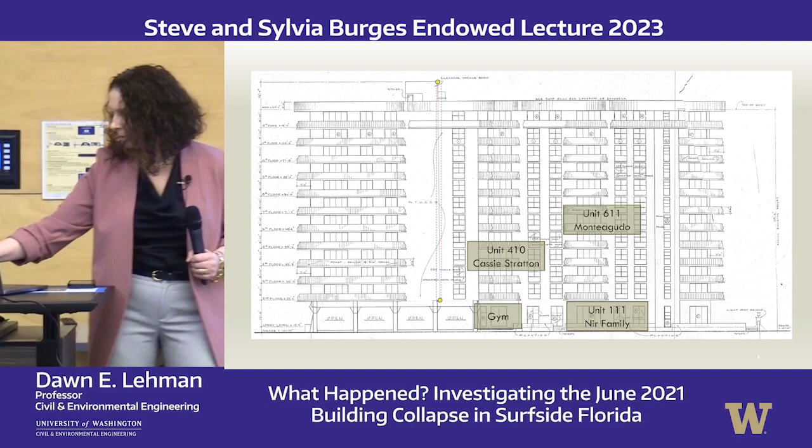Around 1 a.m. in the morning, the Nir family had just gotten home. They were a particular sect of Orthodox Judaism, out celebrating the high holidays. When they came home, they heard some strange knocking noises. Sara Nir, the mom, lived with two of her children, Gabe Nir being one of them. The security guard also heard these strange knocking noises between 1 and 1:14 a.m.

At 1:14 a.m., there was a couple who split their time between Argentina and Miami, actually telenovela stars. Because my colleague Sarah Blaskey understands Spanish, she knew what they were saying, though they didn't want to be interviewed, so I want to respect that. What's important is they drove into the garage at 1:14, didn't see or hear anything, and took the service elevator up. At 1:15, they got lucky because that elevator always stops at the first floor, and as soon as it reached the first floor, they heard a thunderous clap like others did.

That was essentially when the pool deck collapsed. You can see this is the tower where all the people live, and this is the pool deck. These red dashed lines indicate the extent of what we can see, which is really important as we try to understand what happened. We don't exactly know what happened as we move towards the tower, because that's where the rubble pile is.

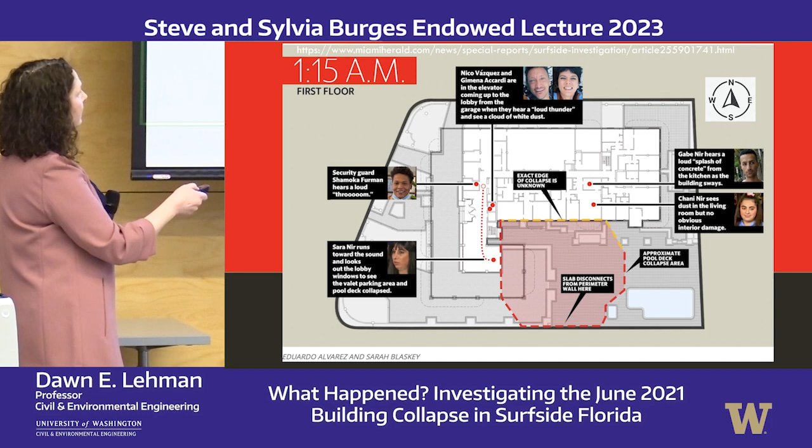At this point the pool deck fails, Gabe Nir and Chani Nir, who are in Unit 111, move and run out. The security guard hears a loud boom. Then Sara Nir, who was talking to the security guard trying to figure out those knocking noises, runs south and comes to a place on the first floor where she can see out, and she saw the pool deck collapse. Everybody on that first floor who heard this exits the building.

Then, to confuse all of us, there was a video — I think on TikTok, but I can't be sure. Social media has become incredibly important for these journalists. There was a woman just to the north at a hotel who took out her iPhone and filmed into the garage. You can see what looks like water, and concrete rubble on the ground.

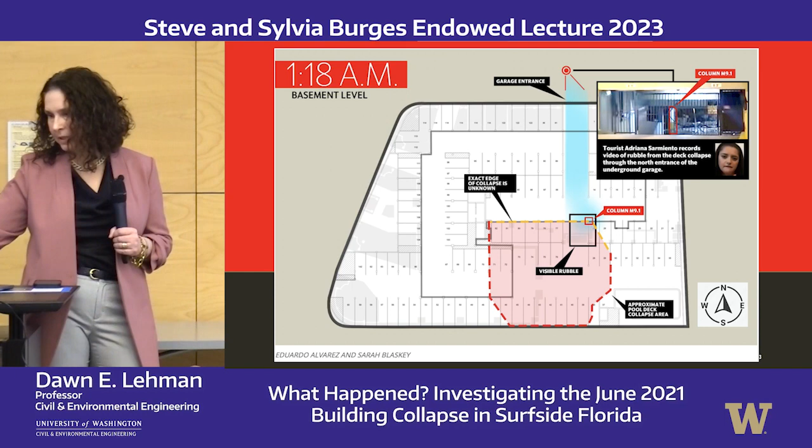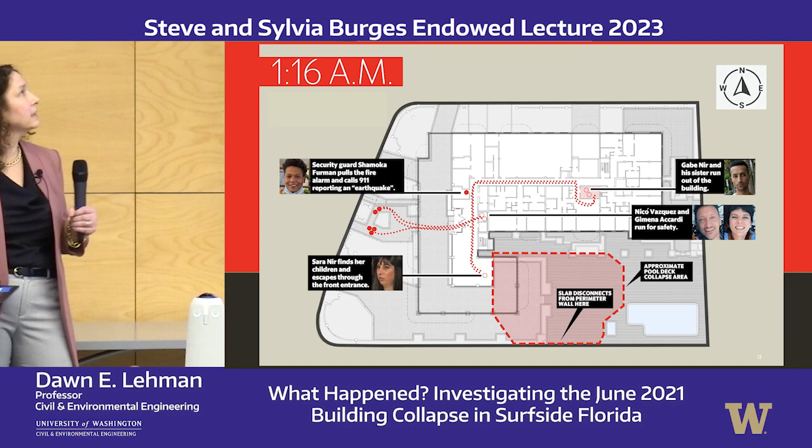Until we understood this collapse sequence, we thought maybe that had failed before the pool deck failed. At 1:16 a.m., as they leave — this is looking into the building, from the Herald — you can see that rubble we'd seen before. Over the years there had been a lot of reports of water intrusion, which is going to be important when we start thinking about how that impacted the failure modes.

At 1:20 a.m., Cassie Stratton, on the 4th floor right above the gym — which becomes important — called her husband to say, 'I'm so glad we didn't leave our cars in the shop, because the pool deck caved in. There's a sinkhole.' I think that's a fair way for a layperson to describe it. She told Mike Stratton that as the pool deck failed, it was coming towards her, which is also important.

When Sarah and I talked to Mike Stratton, we learned there was a building just to the south with an easement between the two buildings, and a sprinkler or irrigation system kept watering that portion of the pool deck. So it was just to the south of the pool deck, but it was watering it. This whole concept of water intrusion through the pool deck becomes important as we try to understand what might have happened.

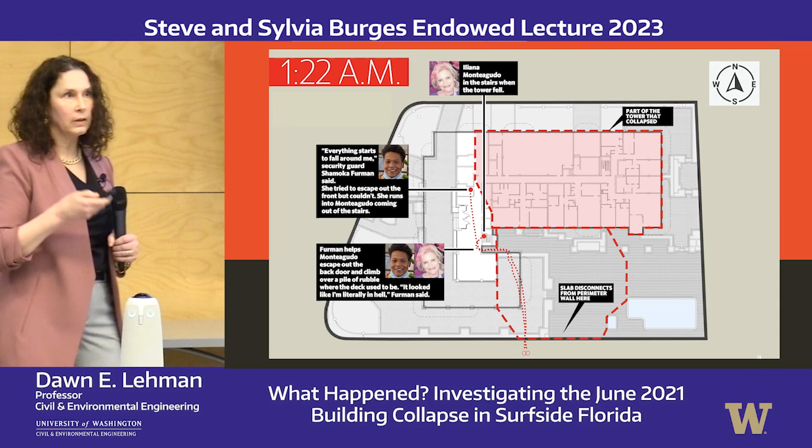And that also becomes important as we look at damage in the building. I've put this up here because this is not an engineering aspect, but it is an unfortunate truth of this tragedy, which is that because the security guard was not trained in using the alarm, and we know there's 7 minutes between when the pool deck collapsed and when the tower collapsed, most likely people's lives could have been saved. If you heard at all about the lawsuit, part of the settlement was with the alarm company. I just want to point that out. If you're interested in learning more about any of this, the Herald has done a great job on that.

Okay, so we have a timeline. We know that there were 7 minutes between the pool deck collapse and when the tower collapsed. And we know when the pool deck collapsed, it was moving towards the tower, not away from the tower. So I still haven't told you what happened. You still don't probably have an idea what happened. We're still sort of here, right? Except that we know that this pool deck collapsed first, and it progressively collapsed towards the tower.

So in order for all of us to think about these things, I want to use some information that I know and anybody else in this room who's a structural engineer and understands reinforced concrete knows. This happens a lot after earthquakes, and a lot of you might know I have done most of my research in earthquake engineering. It might have seemed strange that I decided to take this on. But one of the things is, I studied this building actually with a colleague of mine who's here, Laura Lowes, and we tried to understand what happened to this building.

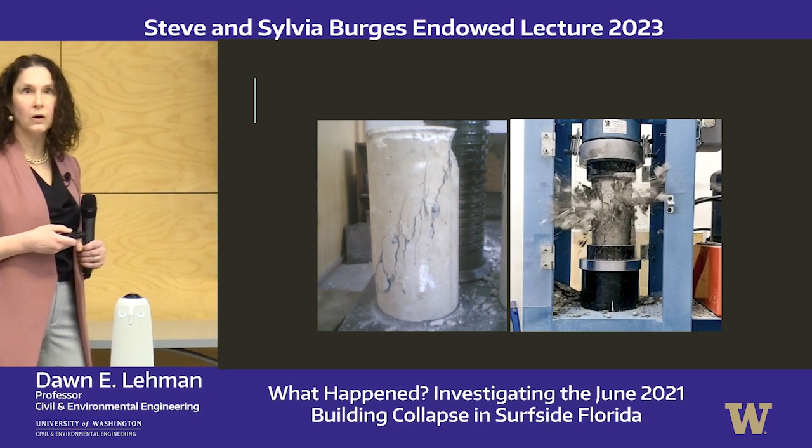Now, how can I say something about it? Well, I can say something about it because I understand how reinforced concrete behaves. And in the next 6 slides, you're going to understand too. So the first thing we know about concrete is that it's good in compression. This is a cylinder - we like to test concrete cylinders to figure out the strength and the stiffness. One interesting thing here is in addition to these vertical cracks, you can see there's this diagonal pattern, and that will become important. The other thing to know is when concrete fails under a compressive load, it can actually be quite explosive. So we don't really want that to happen.

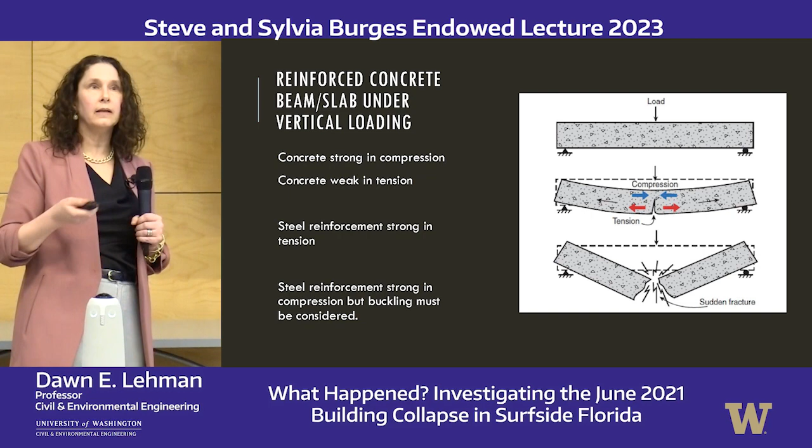So what should we do? Well, a lot of times we like to use structural members so that they carry load, right? For example, this roof, somebody needs to be able to design this for the load we expect, especially the dead load, which is the self-weight, anything that we know is going to be in the structure permanently, and live load - those are unexpected weights: furniture, people, equipment, etc. So we tend to have something that spans between maybe 2 columns. It has a load on it, and the top here is in compression, and the bottom's in tension. It's not always that way. But as we said before, since concrete's not good in tension, it'll just break through.

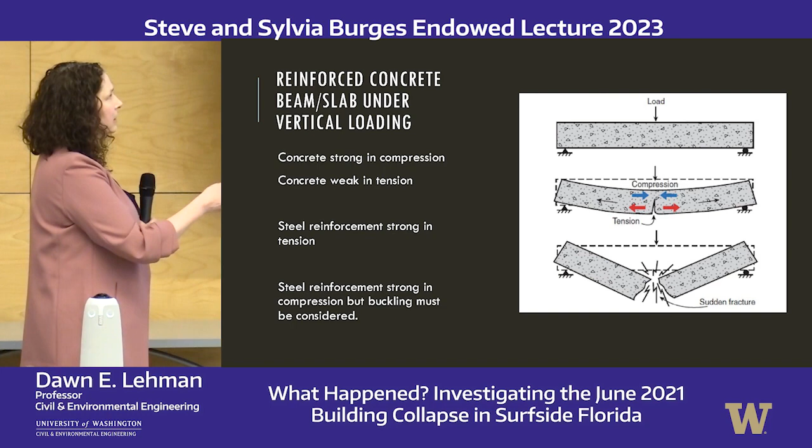So what we do is we consider how these forces are being carried, and we actually place steel where the tension demands are. You can see here, this is a beam that's being subjected to that same point load. The compression forces are at the top - you can see that there's some damage here. But in the tension forces, you can see there are these cracks that are vertical, and we place the reinforcement here to take those forces and also to keep those cracks closed. That's also important when we think about corrosion.

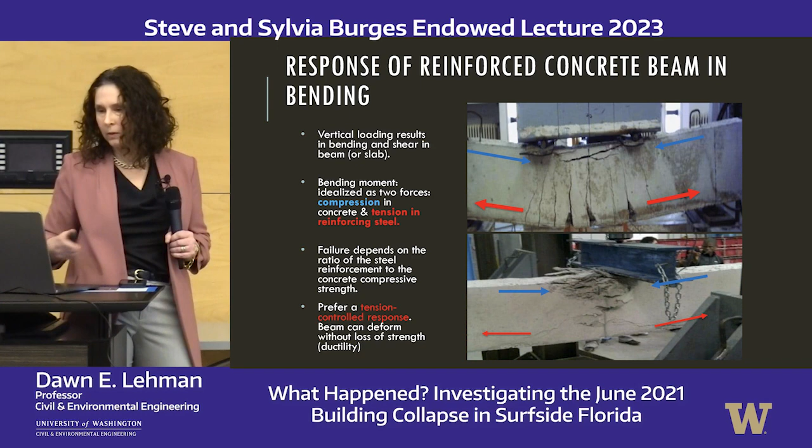If we had a lot of reinforcement that was so much, such a huge area, really strong, then we might end up actually changing our failure mode to compression, and we don't want that. So in general, anything that's bending, a beam, a slab like this, we will see cracking, and we'll place our reinforcement to sustain the tension.

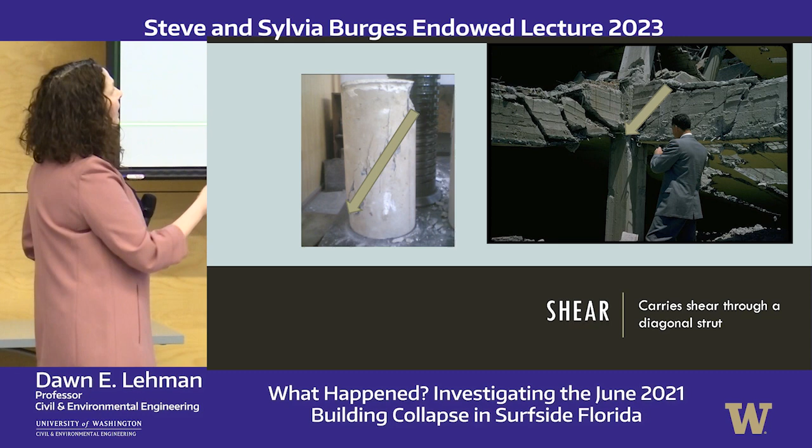The other aspect of concrete that really is not welcome is shear. I talked a little bit about this diagonal strut, because one of the ways concrete carries compression is through strutting action. You can see here, this is a column that failed after an earthquake, and you can see these diagonal cracks that are very open. But you can't carry compression perpendicular to the crack because the crack's open, so you need to carry compression along the crack. That's how we carry shear in concrete typically, which is also going to become important.

The last thing I want to talk about is bond. What is bond? If I have concrete and I put steel in it, I need to transfer those forces between the steel bar and the concrete. If you've ever seen a reinforcing bar, you might see that they have what we call deformations. Those deformations are there to transfer the force from the steel into the concrete and vice versa. So it's almost like another material: the concrete has a strength, the steel has a strength, and the bond also has a strength.

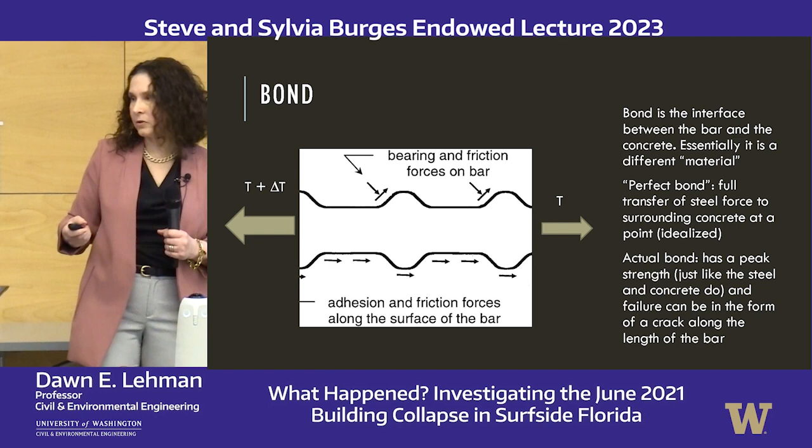If you have high bond demands, you will run into trouble. So you need to have bars that are long enough to allow that transfer to happen. Maybe if you start running a lot of water through this slab or this beam, the concrete properties might not be what you assumed in your original design. Now, I don't know that, but that is possible.

The other place we need bond is when we want to fully anchor this bar. Maybe you've seen after an earthquake, we will have vertical bars from a column going into a foundation, and if those bars aren't long enough, they will just pull out and allow that to move over. So these connections are going to become important.

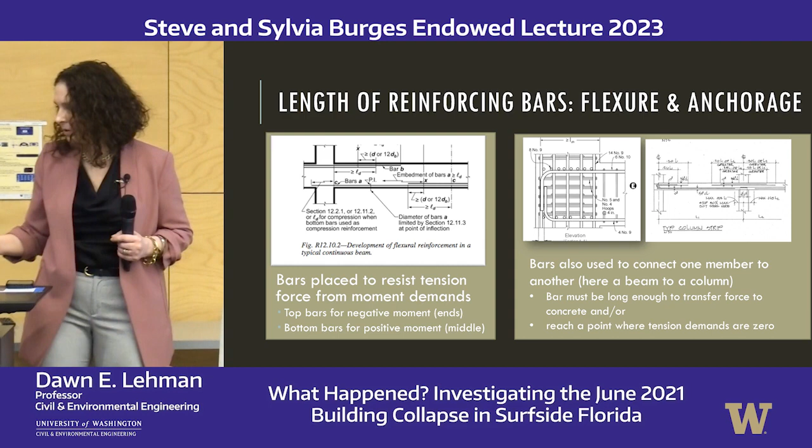So compression: concrete's good in compression, stiff in compression. Tension: anytime we have tension, we really want to have an orthogonal bar to the crack to take those stresses and keep those cracks closed. Also, bond, making sure that the bar is long enough to fully transfer the force from the bar to the concrete, and shear, which concrete likes to carry at an angle. There. Everything you need to know about forensic engineering of concrete, right there.

So now what do we need to do? Well, before I start looking at all these pictures, let's take a little gander at the structural drawings. So again, this is the L-shaped tower we've been talking about. The red rectangle is around the portion of the tower that collapsed, and the green shows the portion of the tower that's still intact.

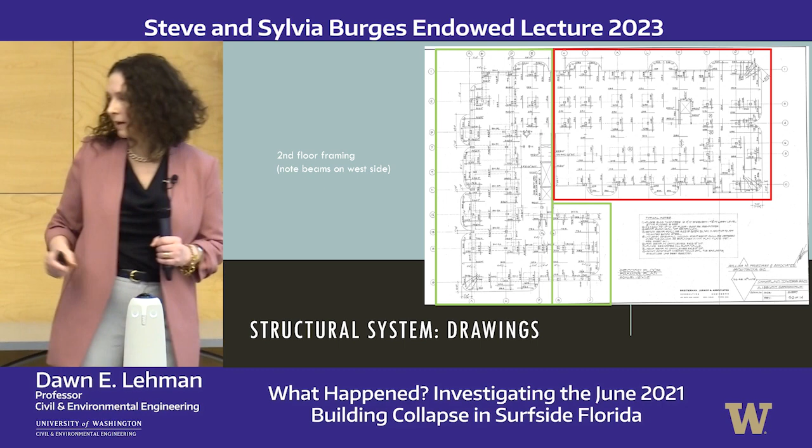What kind of system is this that's holding this building up? It's called a slab column system, essentially a flat slab. I'm showing that above, and a column shown below in a drawing and a sketch.

In addition, sometimes we will use beams. These beams help to strengthen, but they also help to stiffen. Have you ever been in a building, or especially sometimes at the airport, and you can feel the floor vibrating? Turns out people don't like that. It's not going to fall down, but people just don't like to feel the floor vibrating. So a lot of times when we design something like a slab, we actually design the thickness to make sure we don't have those kind of vibrations.

So not everything is designed for strength. But typically, when we design a slab column system, we want the slab thickness to be a function of the bay width, that is, the width between these two columns, because if that gets longer and the slab is still thin, it's going to deflect and crack, and those cracks are going to open. Doesn't necessarily mean the building's going to fail, but it's not going to be serviceable in the long term.

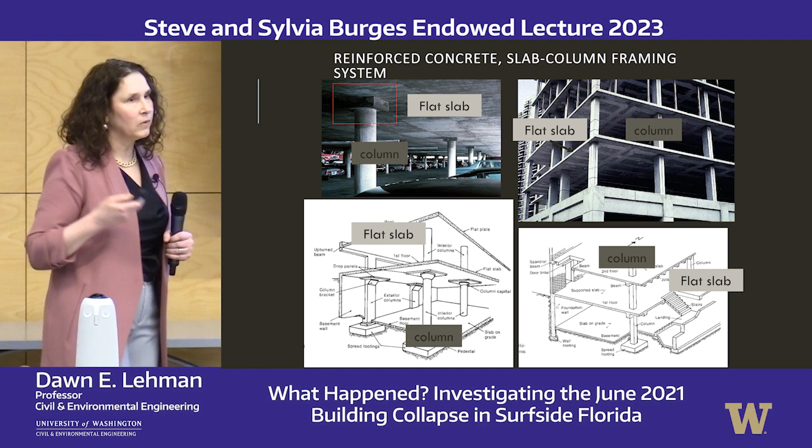So sometimes beams can help you. The other thing is that we know slab column connections can be weak, so sometimes we'll put additional reinforcement and concrete around that in the form of what we call a capital. That didn't happen in this building. So it is a slab column system, and there are some beams, but not that many.

This is a drawing. I'm sorry if this is the first time you've ever seen a structural drawing, but this is a plan of the building.

It shows this exterior wall. This exterior wall is a perimeter wall, a retaining wall. It keeps the soil out—sorry to the geotechnical engineers, we just don't like soil in our building. So we have this retaining wall, and that's going to become important.

These columns are larger; this is in the portion of the building that remains standing. They're 2 feet by 2 feet. The columns that are just supporting the pool deck are smaller, and that's what we'd expect, because these columns are carrying a full building on top, while the pool deck is just carrying the demands of the pool deck. Remember, there's a garage underneath there, so those are just one-story columns.

Now there are some larger spans, anywhere from 23 to 28 feet. I will say these clearly are not the drawings that were used to build the building. How do I know that? Because this is not what the pool looks like over here, and there's no jacuzzi.

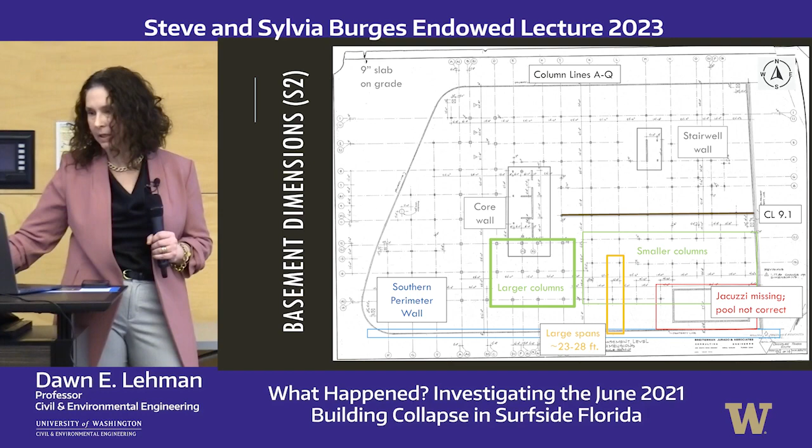This is the level we're going to end up focusing on—level 1. Why am I focusing on level 1? Because that's where the damage initiated, and also that's where I can see structural components, unlike the rubble pile, where I really can't see much at all. Again, the column lines are the same, and this is the portion here that is our region of interest where the pool deck failed.

This is a 9.5-inch slab, and I'll tell you that a 9.5-inch slab is not thick enough for these spans. So right out of the gate, we know this building is under-designed without checking anything or doing any fancy analysis. I'm sure every engineer who went through knew that too. But it's not easy to thicken a slab in an existing building.

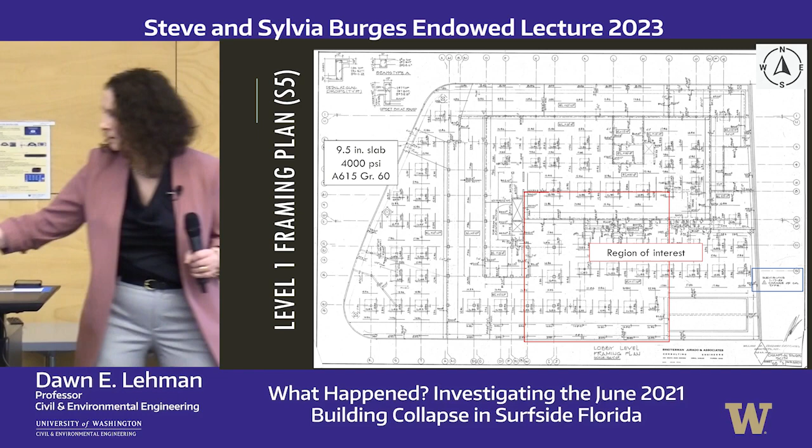The other aspects that become important for us are the connections. Remember when I was talking about bond—we want to anchor these connections. One interesting and important thing to note is this slab is actually connected to this exterior wall intentionally. Whether or not they actually used that in their analysis, I don't know. This building was built to a 1977 code, and clearly things have changed since then.

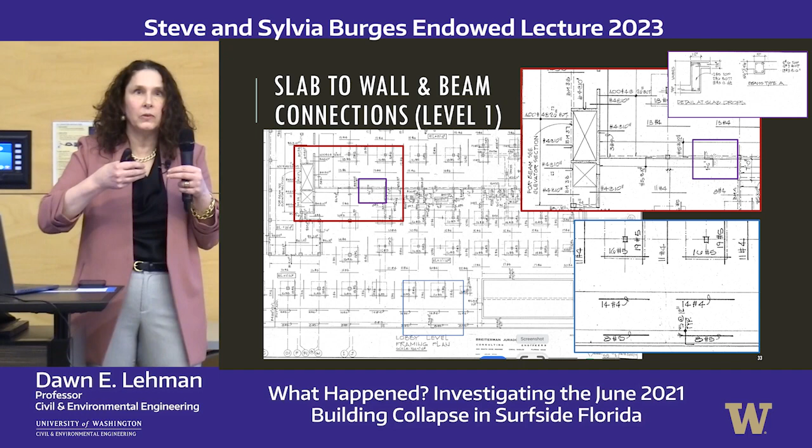You can see here there's a big square around the column. It looks like that might be the capital thickening I talked about before, but that's actually not what that is. That's telling the contractor that this reinforcement denoted within that square—25% of it—should go through the column each way. That is really important to connect that slab to that column. So these connections are important for us.

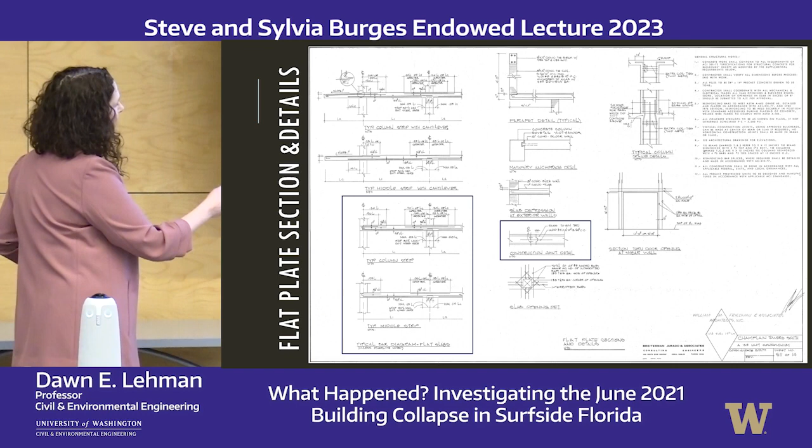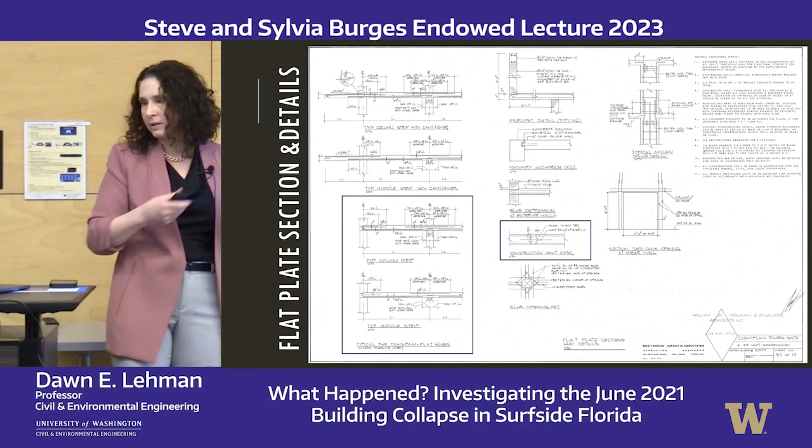This is just a detail of the connection. You can see here the slab connecting to either an exterior wall or a column, and you can see that they've hooked that bar. They hooked that bar so we have that anchorage, so if something happens, the slab will still stay attached to the column.

Okay, now we're going to get into the interesting stuff. Now that we're all educated, all at the same level, we know how to do this. So the first thing we want to do, now that we understand the drawings, is look at the building. There were so many people during the height of COVID who were called in to do a rescue effort.

That's really amazing. The same thing is happening in Turkey right now. Structural engineers are very integral to being able to take apart a debris pile so that the people doing it remain safe. I'm very grateful to those people for doing that.

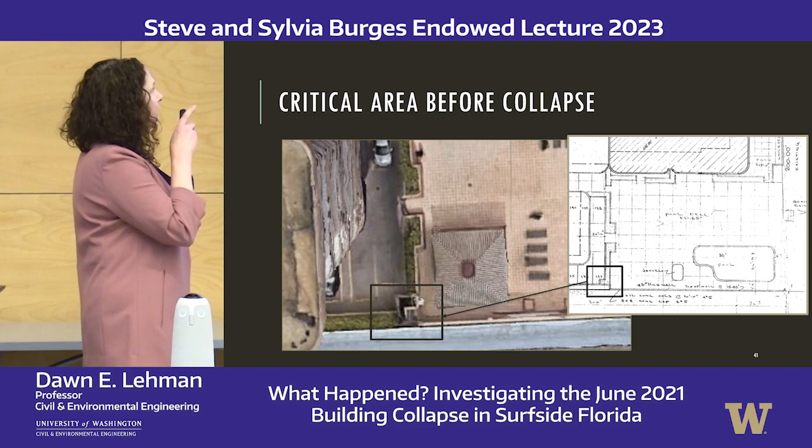Okay, so here's where we really want to start trying to understand what possibly could have happened. Just notice here, and this pool - I don't know if you read about the pool. People said, oh, the pool's corroded. Was the pool corroded? Yes. But the pool's still intact, and this whole portion of the pool deck is still intact. And this portion of the pool deck collapsed, even though the connections here and the connections here are the same connections. So it can't just be the connections - something else must have happened.

What's a construction joint? I forgot to tell you that - okay, this is the bonus in the class. A construction joint is when you cast part of a slab, right? You're not going to be able to cast the whole thing at once, and you want to cast the next part, so there's a joint between those two castings, and usually we put reinforcement through there. So we will look at that.

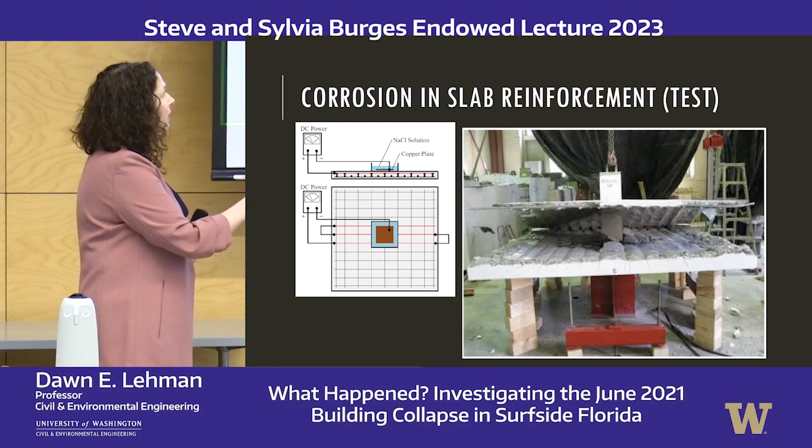Now I'm going to try to incorporate a little bit of testing to show what happened. So somebody took a slab in their lab and they built themselves this basically salt bath, and they corroded these bars. And when they corroded the bars, you can see what it looks like—there's essentially a failure plane, a horizontal failure plane, because those bars were corroded.

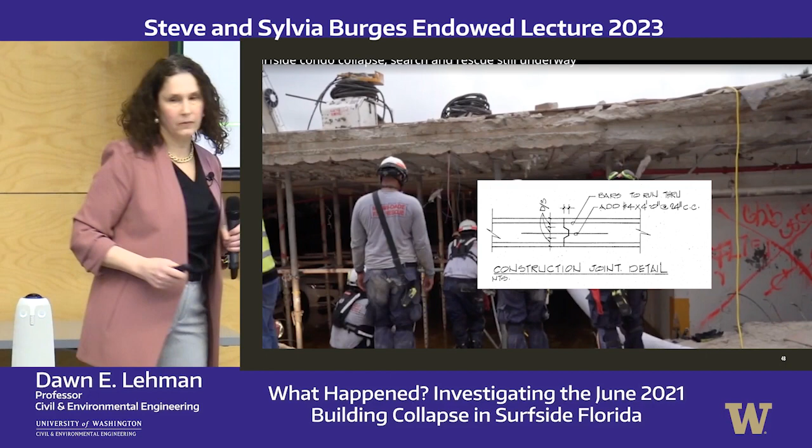So it does seem that there's the potential—and this is the other side, so there's the western extent—and again, you can see that same sort of damage mode where these bottom bars have pulled out. So one of the things that we do in reinforced concrete is we put cover, a concrete cover beyond the bar to prevent corrosion. Unfortunately, when this building was built, the cover that was required within this garage was only 3/4 of an inch. It was not enough to keep these bars intact and prevent them from corroding.

And then the last thing I want to talk about here is this connection. This is a pretty well understood damage mode where the slab has detached from the column. This is just an example from an experiment, and you can see when they cut it apart, there was this diagonal crack that we had talked about before, right? Compression—concrete likes to carry compression through that crack—and then this horizontal crack, which is sort of like this plane of weakness. And so you can see there aren't any bottom bars here, so there's really nothing to keep that slab connected except for potentially the bars, but you can see here that, again, there are bars that are attached to the column and they slipped off.

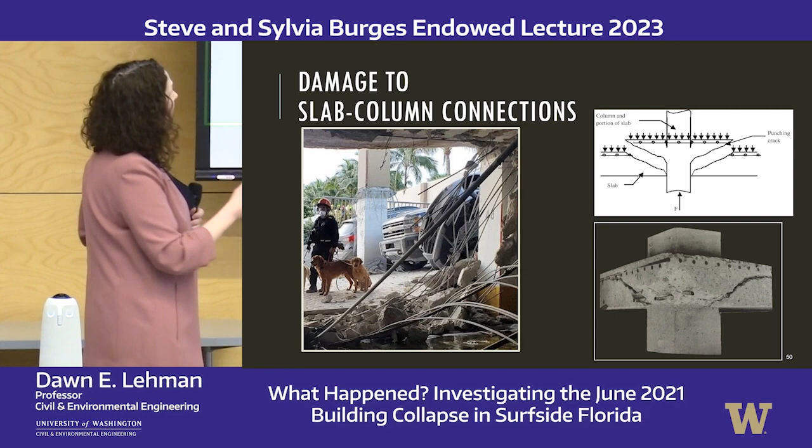So the last thing that was really important to me, and that I spent so long looking at, was this southern perimeter wall and the damage along the wall. Because I know that if you have a connection and that connection has the same properties, then the damage should look the same all the way along the length of the wall, but it doesn't look the same at all. Here you can see part of the wall is missing—it looks like there are chunks of concrete. When I go over here, it looks like there's gravel. There is gravel because there's gravel in the easement that's just to the south.

So these are the things that we ended up focusing on. This is an image from the Miami Herald looking at these columns that have poked through, and also trying to understand what happened in that wall region.

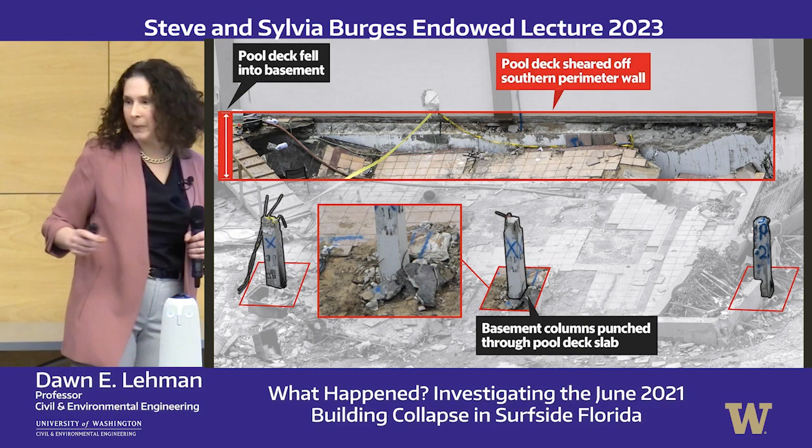This is an image from the Herald where you can see that here there's just a vertical shear plane, and as we move west, we see a different type of damage. Here it looks like somebody came in and added reinforcing bars, which is what I think they did.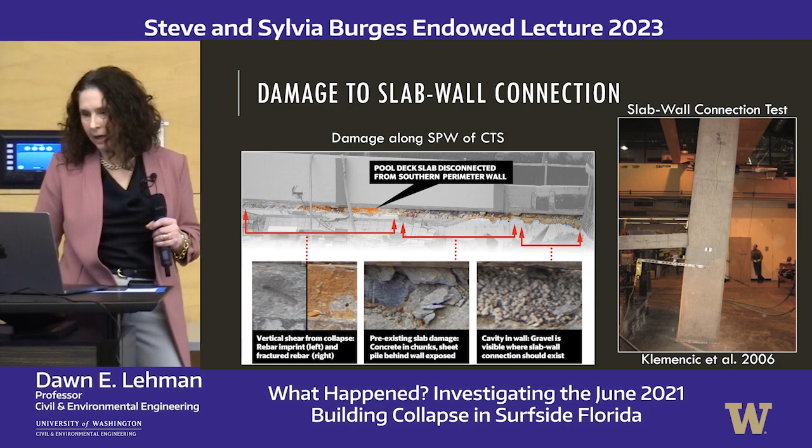The last thing, somebody, I don't know how, flew their drone on this site after it was cleared. I'm thankful for it because this really gave me a better understanding of this wall. So here is the area that looks like somebody came in and cut in and replaced some of the reinforcement.

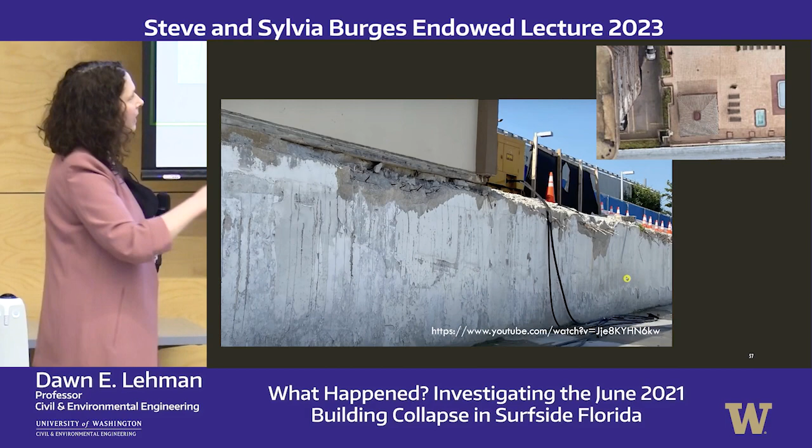You can see these areas where it looks like the slab reinforcement had fractured and then just distressed the paint on the wall. You can also see here there's a different damage pattern where these reinforcing bars had pulled away.

So one of the things that came out after Nikki and I had done our modeling is that through discovery, they found that the contractor apparently didn't care about that wall. So it does lead to the idea that perhaps somebody damaged this wall, maybe during construction of the 87th Park building, and that might have been why we saw the full failure that we did, because that connection wasn't intact.

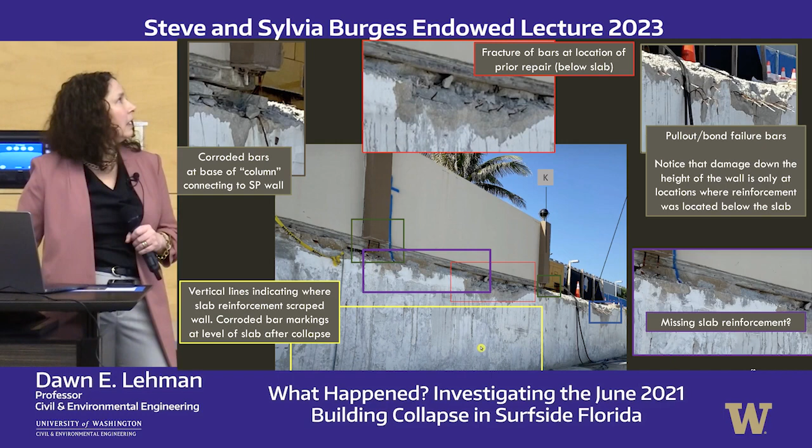And this is just a description of what I have been talking about to date. Okay, so I want to end.

Now this is like PhD level work. So I want to end with how do we understand what happened now that we've seen all of that.

So I came in to this not to model the full building, not to model the full collapse. That's what NIST is doing. What I wanted to answer was, how does damage in the pool deck 60 to 80 feet away from a building result in damage in the building? It seems like I damaged the pool deck, it shouldn't be impacting the building.

And so that's really what Nikki and I focused on. This is just to say we used a peer-reviewed model, and you can see here, this is a column, and there are these little squares of concrete, and these bars are embedded in those concrete cubes as reinforcement.

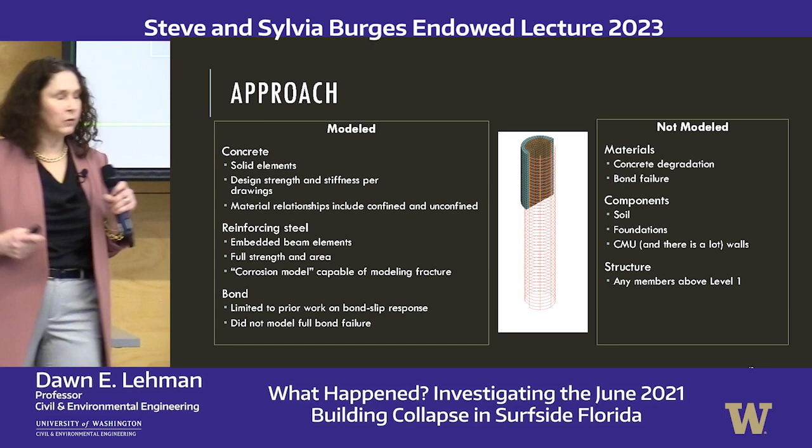Nikki really built a full model of level 1 with a very refined area where we know that, basically this is one of the eastern portions of the damaged region, and this is a western portion of the damaged region. We don't really know what's happening in the building, so we actually did a bay of that building with a very fine mesh as well.

And then surrounding it is just a more simple model. These models are very computationally intensive. We used a high-performance computing cluster, and some of them took 20 hours to run.

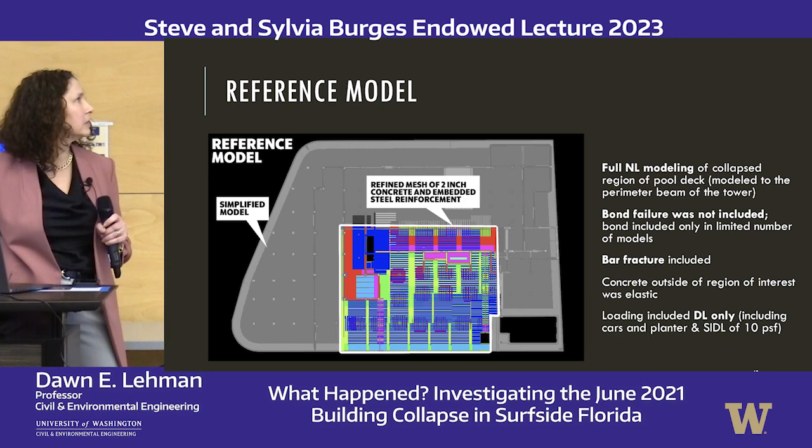So this is also an evaluation. We only put load on this level 1, as well as the additional load from the columns above, but we only put on the loads that were there. And we only used the properties that were as designed, except for one thing.

So essentially, I'm going to look at three different models: the reference model, the model with taking some of that steel out and replacing it like we saw in that wall, and then corroding the reinforcement. And I will try to present a couple of very simple images.

So this is an image of the vertical deflected shape, right? So we're pushing down. This is the plan. This is the jacuzzi. This is the core wall. And that's the edge of the building. Each of these colors, as they get darker, is a higher state of deflection.

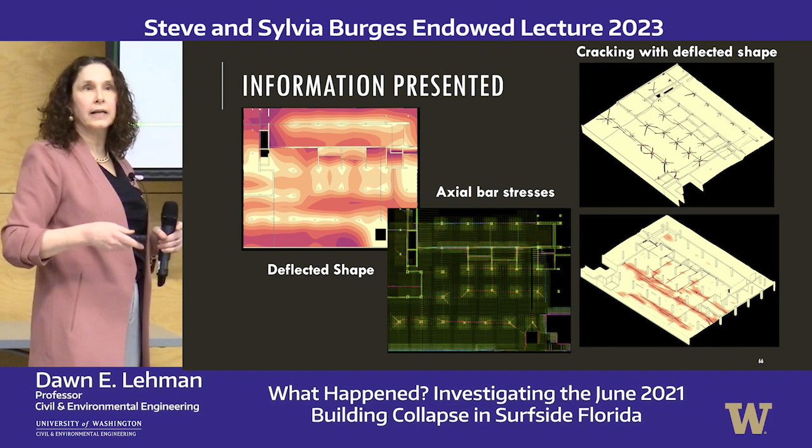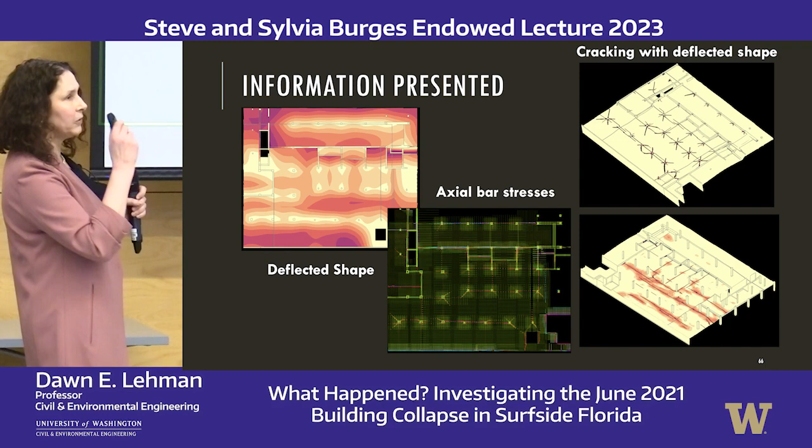Remember the bars that we've been talking about a lot, that we need to connect one component to another, to take the tension force, to keep those cracks closed. We also want to look at what the stresses are in that. And then we also have the crack pattern at the top of the slab, and this is at the bottom of the slab. You can see these columns here, and this is as if you were in the garage looking up.

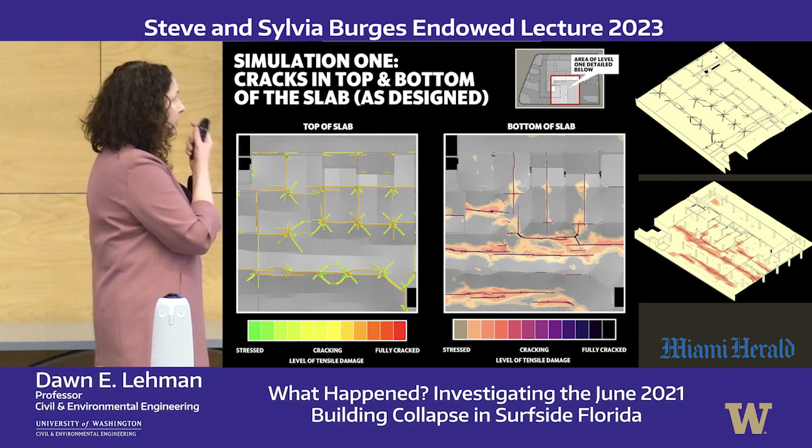So this is what the Herald did with what Nick and I were like, oh, they're fine. The Herald had to color them pretty. But essentially, this is what we saw just at the as-built, if this is actually as-built, it's hard to say. But you can see we have a lot of cracking around the columns. This is exactly what we would expect. Concrete is going to crack under load. So the fact that there are cracks is not the issue. The issue can become when the cracks are too large or the system has degraded.

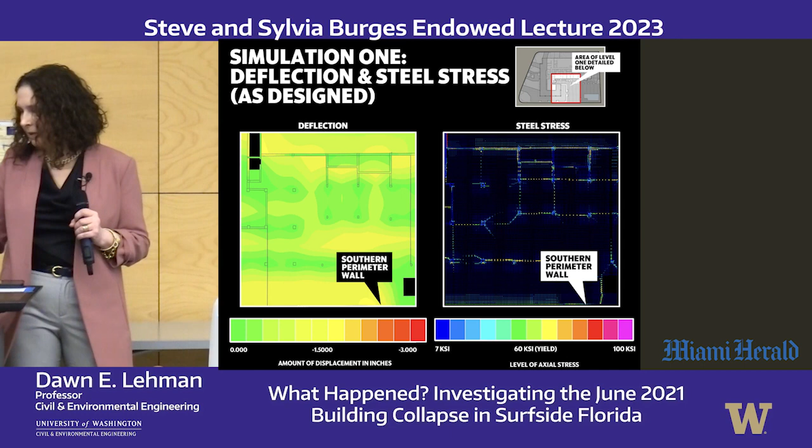The other thing we would like to look at is what's going on with the steel. The steel yields at about 60 KSI, and you can see that there are bars just under dead load alone, without any load factors, that are reaching yield. So this is already a very under-designed building. It stood for 40 years, but it's an under-designed building.

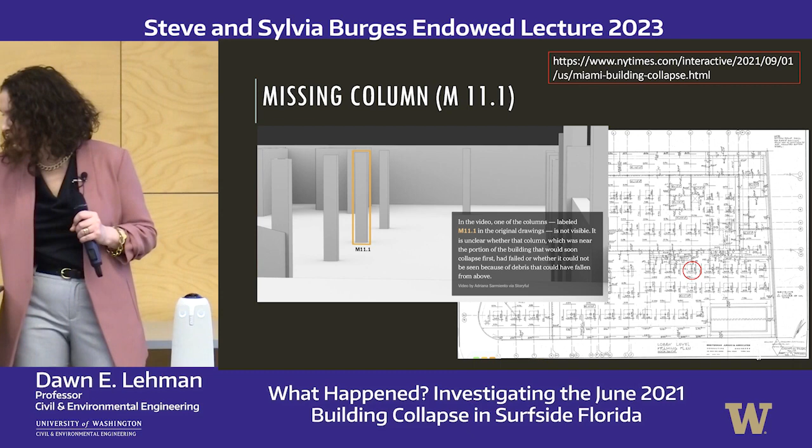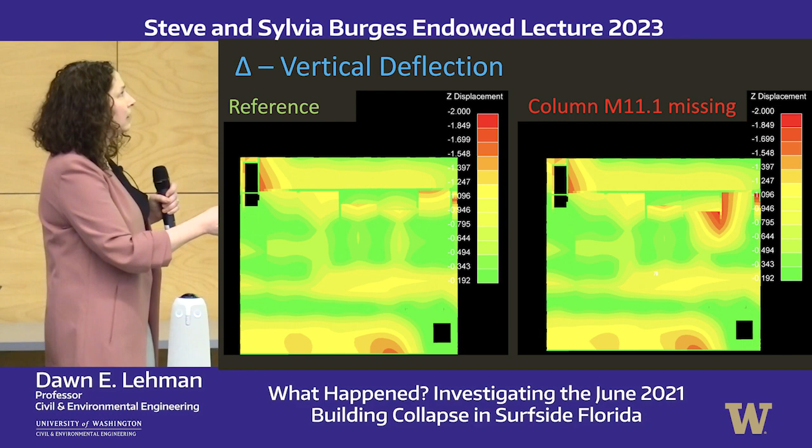What happens if you take a column out? Well, it turns out that you get a lot of deflection where you took the column out, but you don't really get anything else. Remember that the pool deck started to fail somewhere here and move towards the building. So just taking the column out alone is not going to do that.

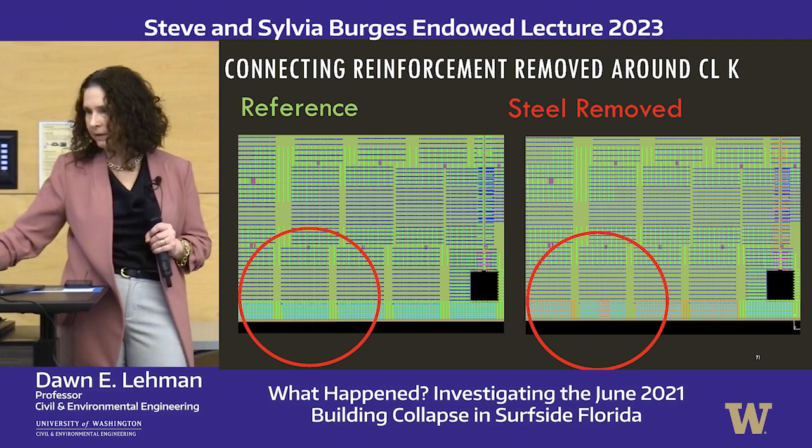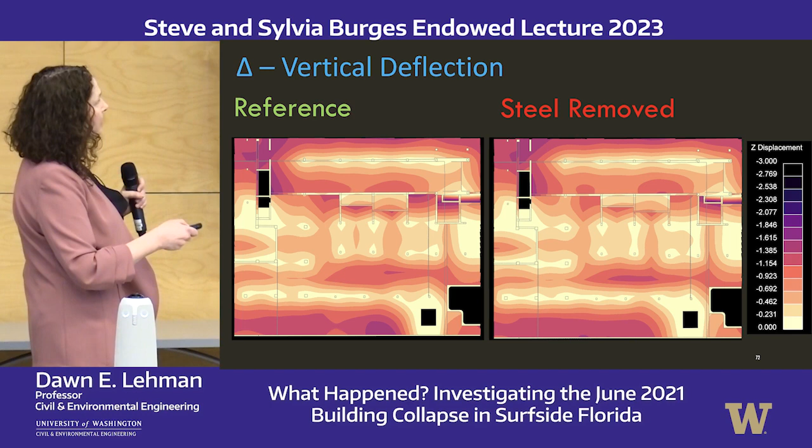You can see that there's a more uniform deflection of the slab along the length of the wall. We did also get some increased deflection in this bay relative to here, which makes sense, right? This is a continuous system, so what happens in this bay can impact that bay. That is one of the reasons that we modeled the full first story.

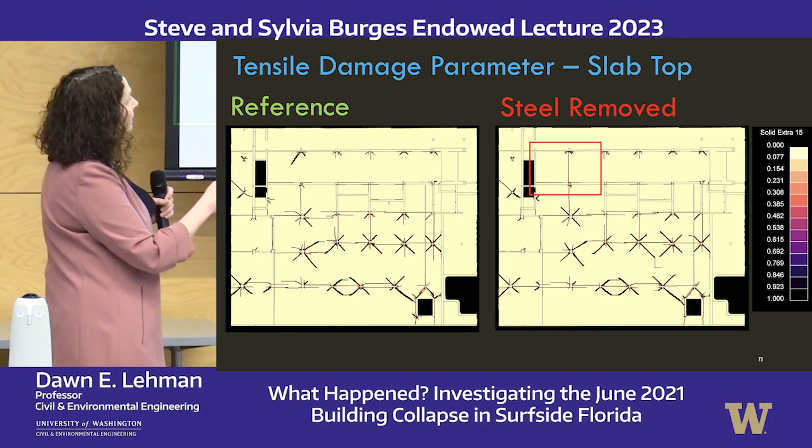This is a comparison of the tensile damage. This is what we were looking at before. Over to the right, you can see that removing that steel put damage into the building, and it did it at the gym. So you can see here that it's not a very significant crack, but it does suggest that there was unwanted cracking before the building collapsed.

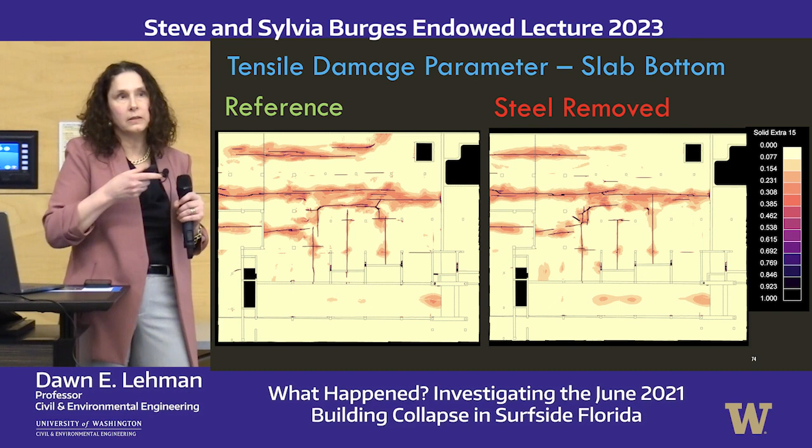This is if you were down below looking up. You can see that there is some difference in the crack pattern. But again, remember what we're trying to do is say what happens, how does damage in the pool deck result in failure and collapse of a building? How does that damage impact what's happening in the tower?

So this is the reference reinforcement. You can see if we remove some of the steel here, the connecting steel between the slab and the wall, those bars that are connecting the remainder of the wall to the slab actually are more highly stressed.

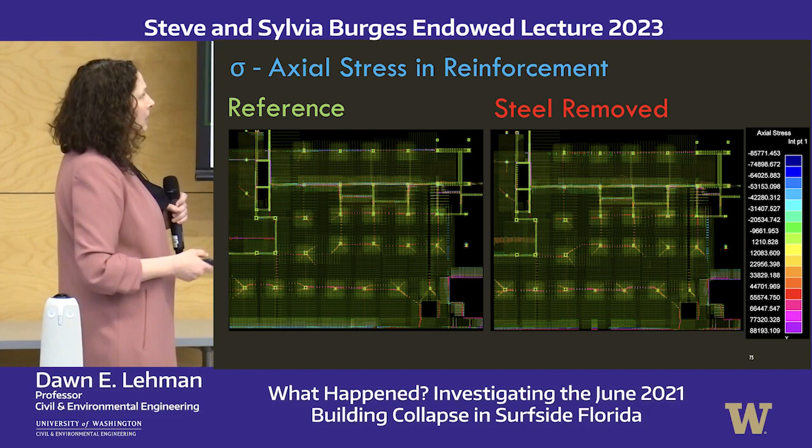So we came up with a hypothesis from this. The idea we had was that the damage started at the exterior, at this continuous slab wall connection, and then it moved north through these slab column connections. Once this continuous connection was damaged, we would increase the demand on those slab column connections, not just force but also deformation, which could result in failure of those, and then resulting in damage up into the building.

Now, a number of folks have been concentrating on the area that was in front of the near unit, and I started there too. But there are a lot of beams that are framing orthogonal to the perimeter beam in the tower here. And reinforced concrete is smart. It can change its angle as it's being deformed, and there's no reason it would have to go through all that structure when it could just go through that flat plate and enter into the gym.

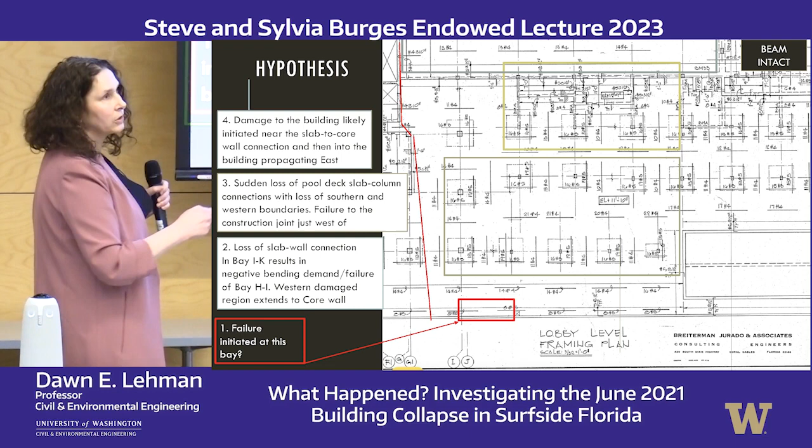So why do I think that is also reasonable? Well, the other thing is that, this is the Herald's anatomy of a collapse, but this is a structural anatomy of a collapse. This is a really nice set of tests that were done.

What this testing did was it had a slab column system, just like we're looking at, and started the damage, or essentially released the load, but damaged an exterior column versus an interior column. When they damaged the exterior column, they got collapse. When they damaged the interior column, the slab was still capable of sustaining those forces.

So what did we do? We looked at corroding the steel. Steel corrosion, as you might know, can change the area, but we didn't do that because we didn't know how much area could have been taken off of those bars, since we didn't have access to the site. But we do know that corrosion can reduce the strain or the deformation.

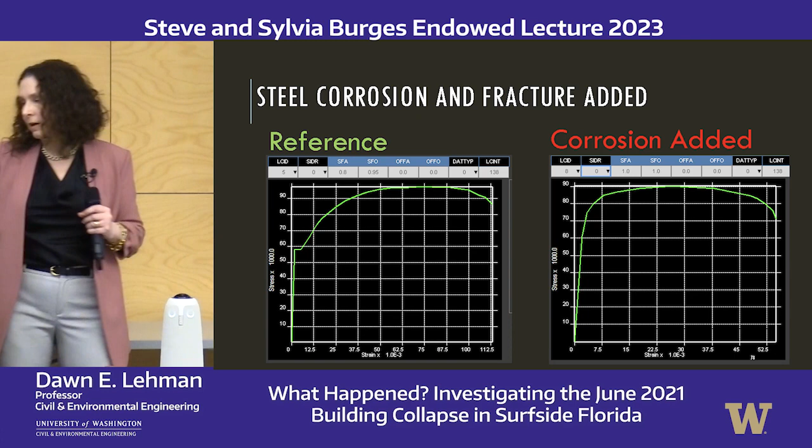If you think about pulling a rubber band, at some point, if you pull it enough, it will break. What's happening is the corrosion is affecting the material properties of the steel such that you can't pull it as far. It's called ductility, but essentially we've worsened the condition of the steel.

And the steel is really important, as we know, to connect the slab to the columns, the slab to the wall. We also made sure that we only included corrosion in the regions where we saw it, so at the slab wall connection and also at the construction joint.

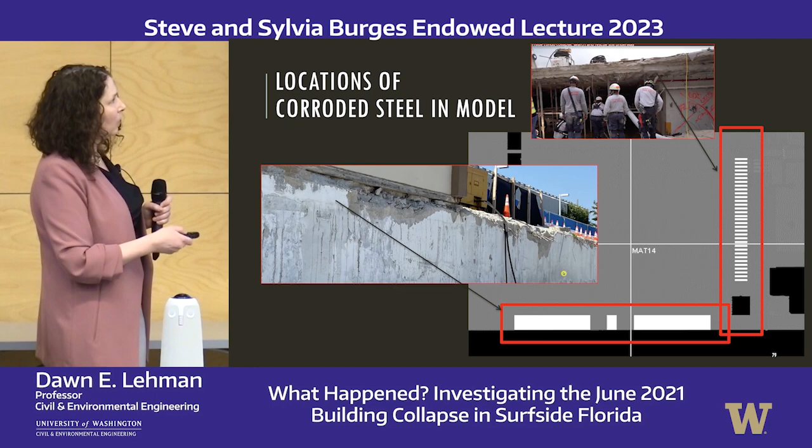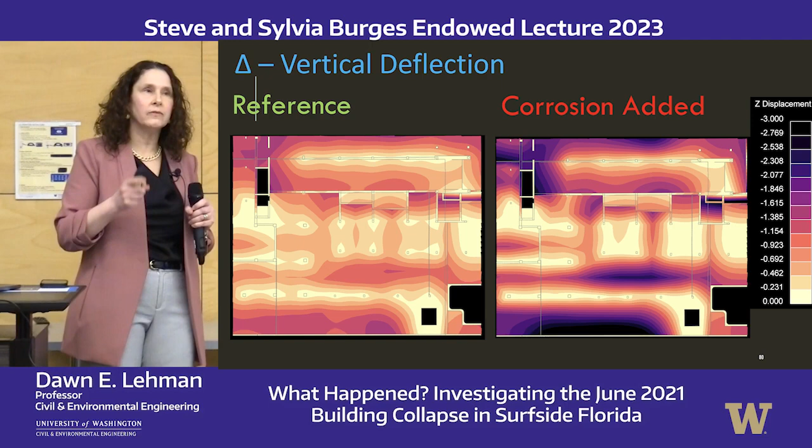When we do that, you can see just from the vertical deflection - this is the reference - how much deflection we have in the slab. Obviously this is fractured, so there's extensive deflection of the slab, but there's also more deflection in the building itself. And remember, that's all we're trying to investigate: how does damage in the pool deck result in damage in the building?

The other thing that came out of the discovery was that this column line, which has the planters - the column line we've been looking at - had damage just a number of days before the building actually collapsed. This damage was in the form of this crack in the planter.

And that could have been because this column here has water damage on it that has discolored the paint, as you can see, and that water is just going through the slab column connection. Could there have already been some degradation to the slab column connection? And that actually contributed to the failure.

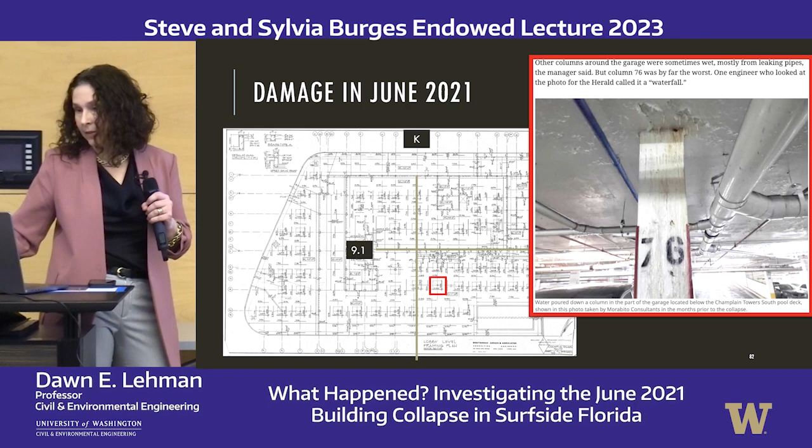This is just an image that the Herald put together so that you know where we are. We're looking at that column and this planter. This is that surface level parking that we talked about, where this western portion of the building primarily remains standing.

So there is evidence now that there might have been previous damage to this building that would have weakened this portion of it and allowed for this collapse.

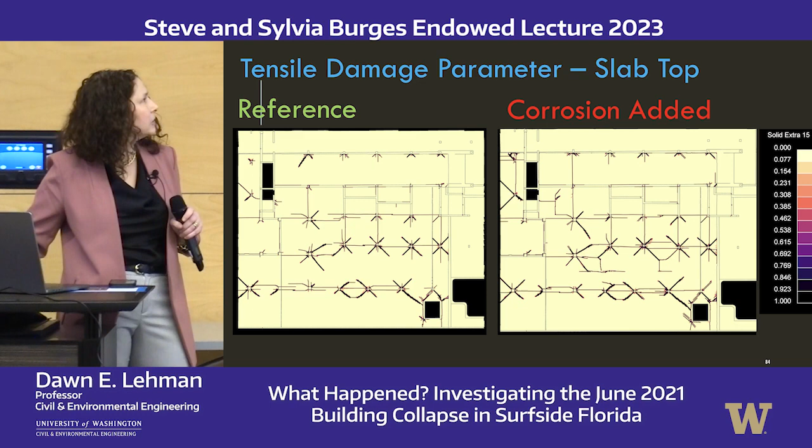So if any of you are really interested in this and understanding more about it, because I clearly didn't answer the question of what happened, I would encourage you to follow NIST. They have, I think the sports analogy is a dream team. So they have folks looking at the building.

They've tried to preserve as much of the debris as they could, and they were also going to test that to understand the properties of the concrete and the steel, which we know are important. They have a great group of geotechnical engineers who are looking at the impact of the surrounding site and the soil, as well as a team looking at just the structural engineering of the system.

And we gave a presentation together. I know for a lot of us journalists, you feel like they're not necessarily listening or respecting what you're saying, but if you find the right journalist, especially an investigative journalist, I think you can actually create a great partnership. I think Sarah and I did that. She's so bright, she caught on so quickly. She was just such a joy to work with, and she pushed me.